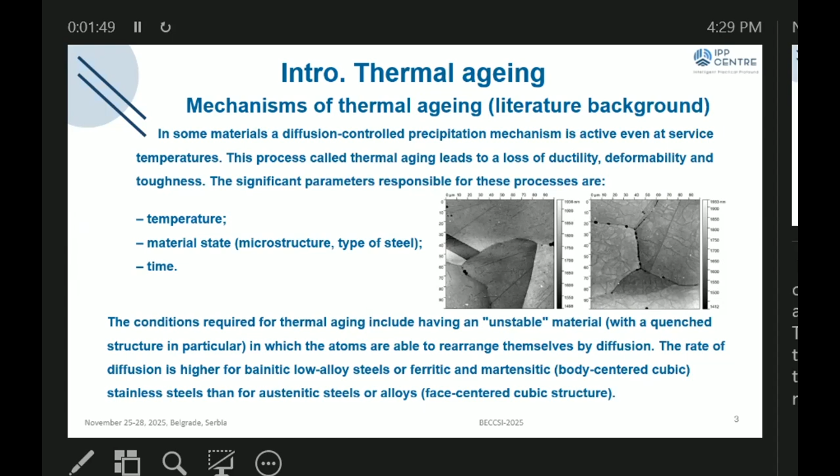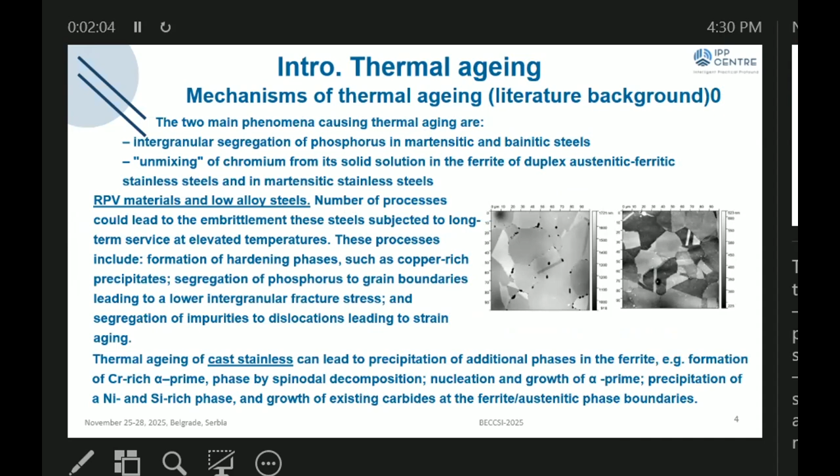The two main phenomena causing thermal aging: the first is intergranular segregation of phosphorus in martensitic and bainitic steel, and second, unmixing of chromium from solid solution in the ferrite of duplex austenitic ferritic stainless steel and in martensitic stainless steel.

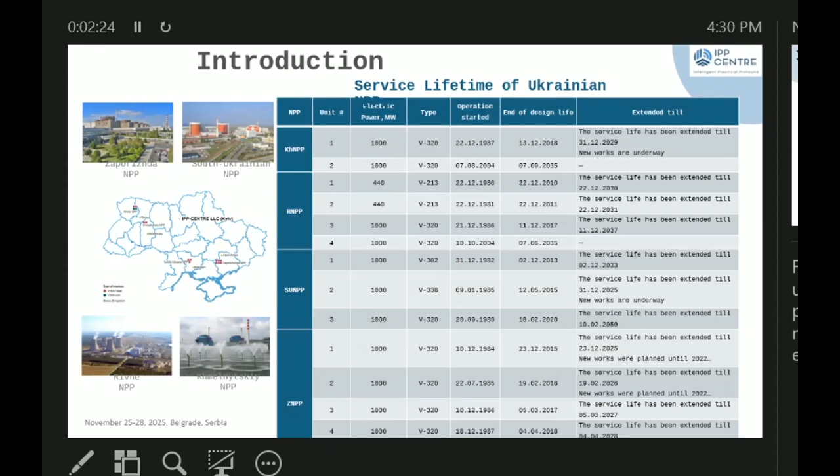In Ukraine, the mechanical properties are controlled based on hardness results. However, this method has a large error during the measurement and recalculation.

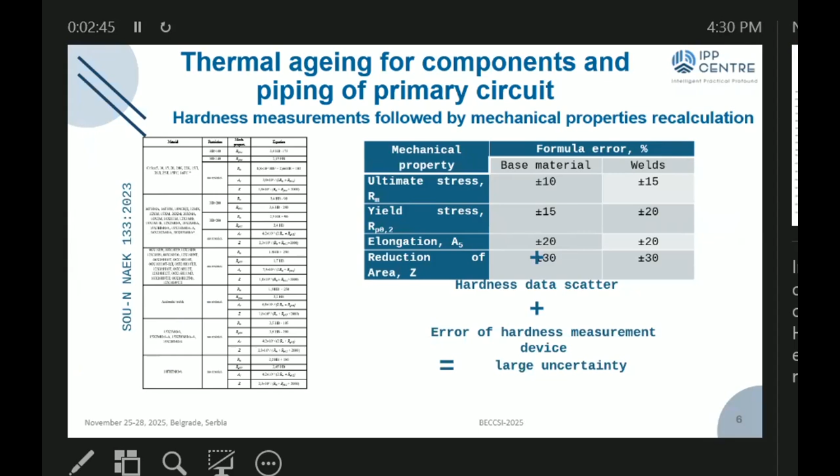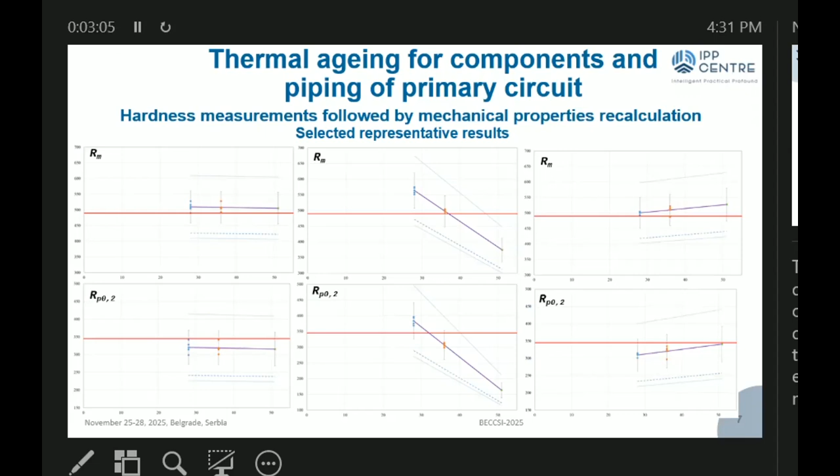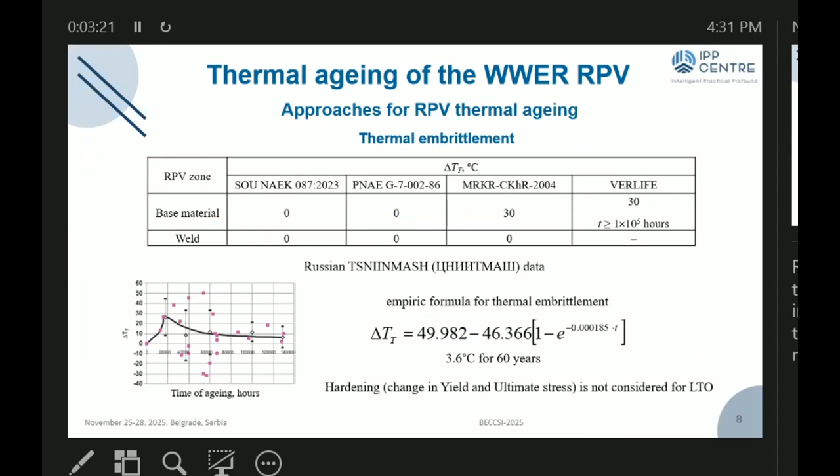Regulatory documents state that thermal embrittlement is only taken into account for the RPV. According to this document, thermal aging does not affect LTO, long-term operation. Also, thermal aging's effect hasn't been determined yet; it could affect operation up to 60 years.

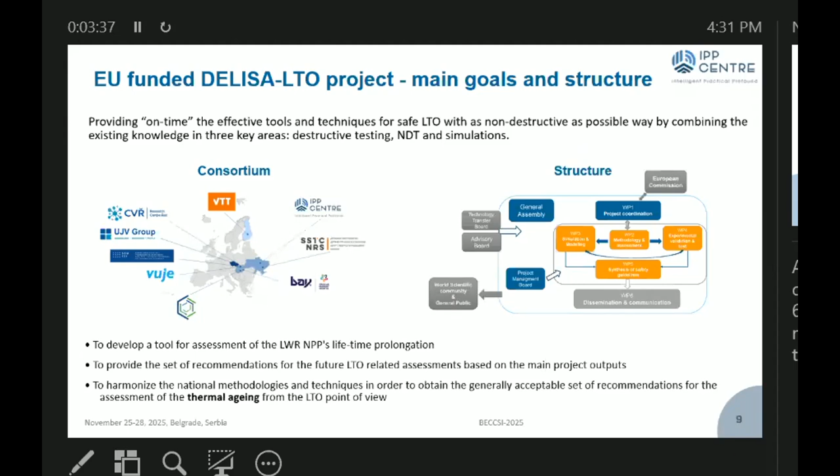Therefore, the main task of the DELISA-LTO project is to investigate the thermal aging effect. To investigate these effects, 3 materials were selected for testing.

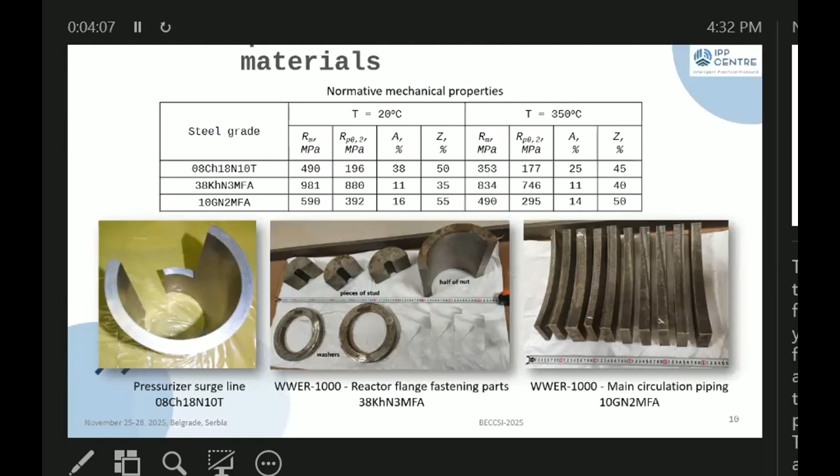The first is austenitic stainless steel cut from a pressurizer surge line after 28 years of operation. The second is ferritic steel cut from reactor flange fastening parts after 30 years of operation. And third, ferritic steel cut from main circulation piping in its initial state. The normative mechanical properties are shown in this slide.

A laboratory oven was used for artificial thermal aging. This process was carried out at a temperature of 723 degrees Kelvin. The aging time varied from 252 to 3944 hours, calculated using this equation, where T1 is the operating temperature and t1 is the operating time at the operating temperature.

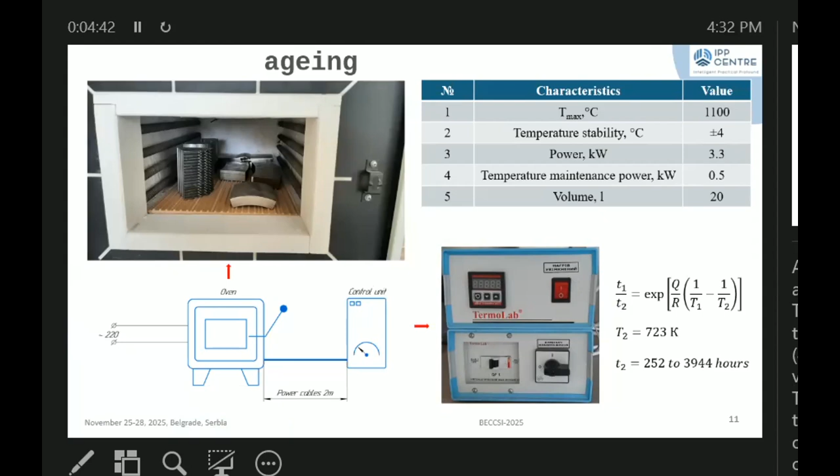To investigate thermal aging effects, 4 types of experiments were conducted. The first is the tensile test. For this test, we designed and manufactured grips with adapters, which were mounted on our testing machine. This grip allowed us to conduct experiments at both high and low temperatures. At least 3 specimens were tested for each temperature as well as each type of material.

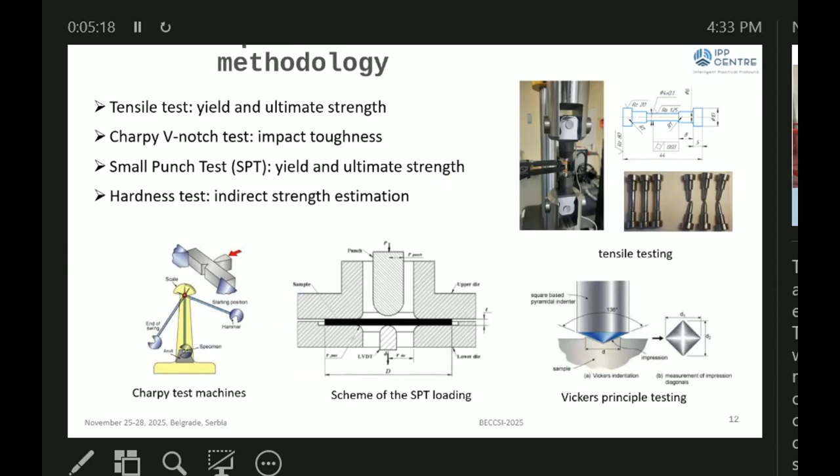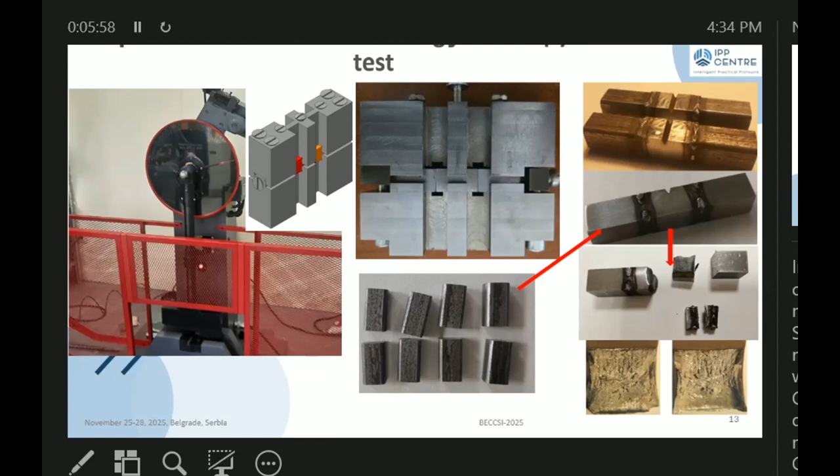Impact toughness was determined using an impact pendulum tester with a maximum impact energy of 300 joules. Given the small amount of material, a device was designed and manufactured for reconstructing the Charpy specimens using 1 broken half and 2 side inserts. The Charpy specimens were reconstructed using laser welding. We used standard Charpy specimens with notch dimensions of 10 by 10 by 55.

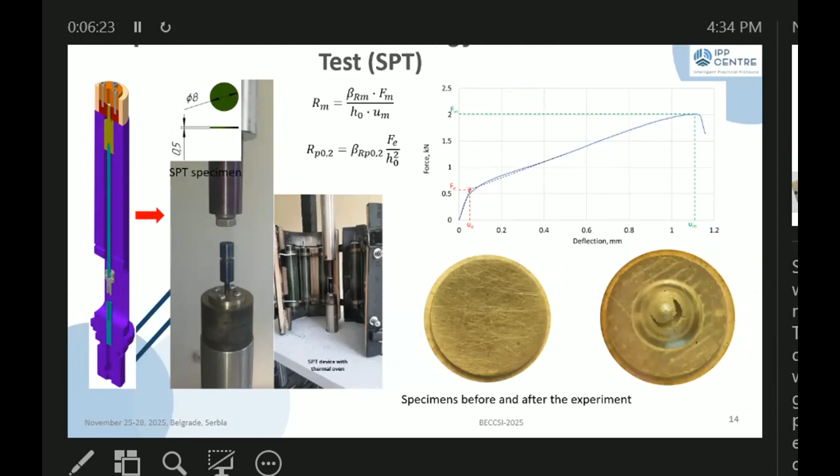Similar to the tensile test, grips with adapters were designed and manufactured for the small punch test. The grip consists of upper and lower die, between which the specimen is placed, the punch, as well as the grip bushing. Here you can also see one of the test graphs and a specimen before and after the experiments.

To determine the hardness, we prepared the metal surface in advance. The test was carried out using an Ultracon TM40 hardness tester. Using the equation shown in this table, we determined mechanical properties such as ultimate and yield strength, as well as relative elongation and reduction.

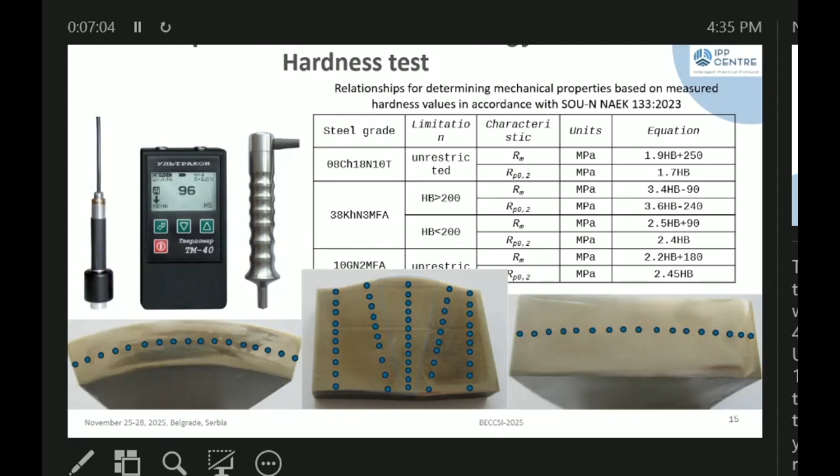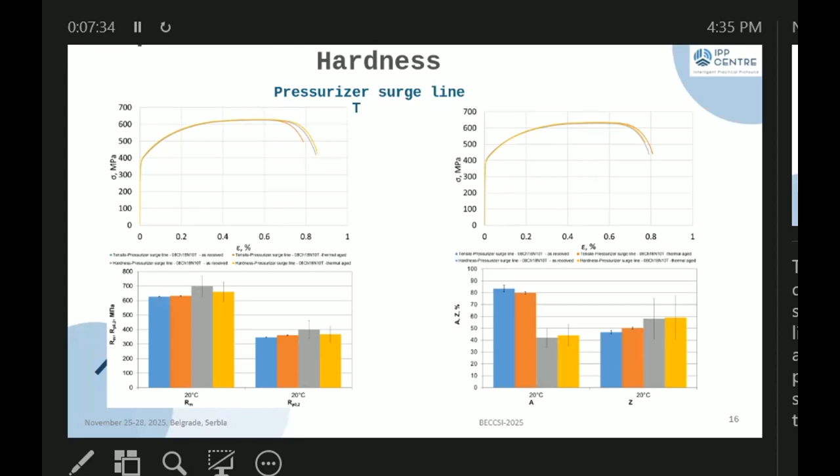This slide shows the result of determining the mechanical properties of steel cut from the pressurizer surge line. Here you can see the stress-strain diagram before and after thermal aging. As you can see, it's quite a similar diagram, and thermal aging almost has no effect on mechanical properties for austenitic stainless steel.

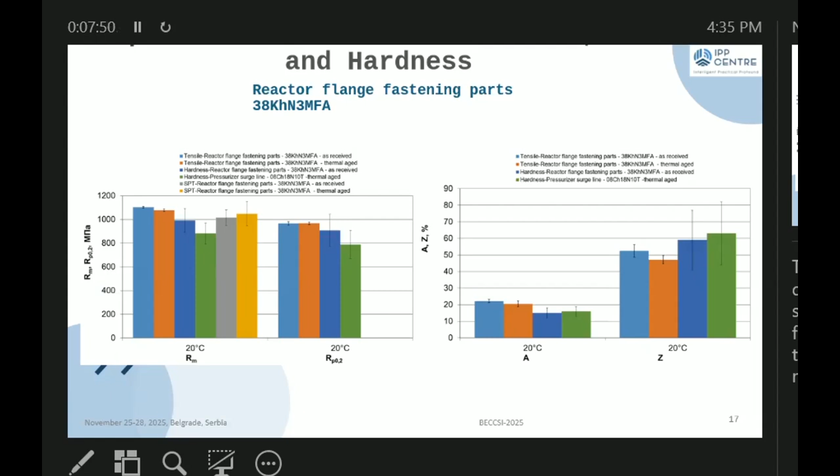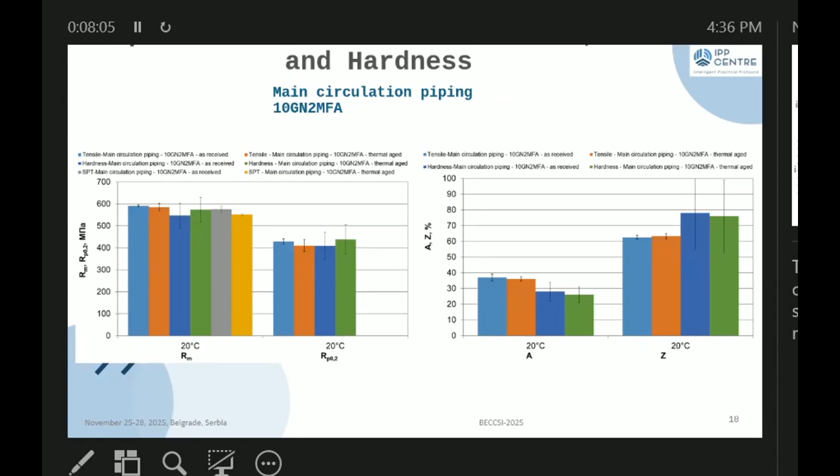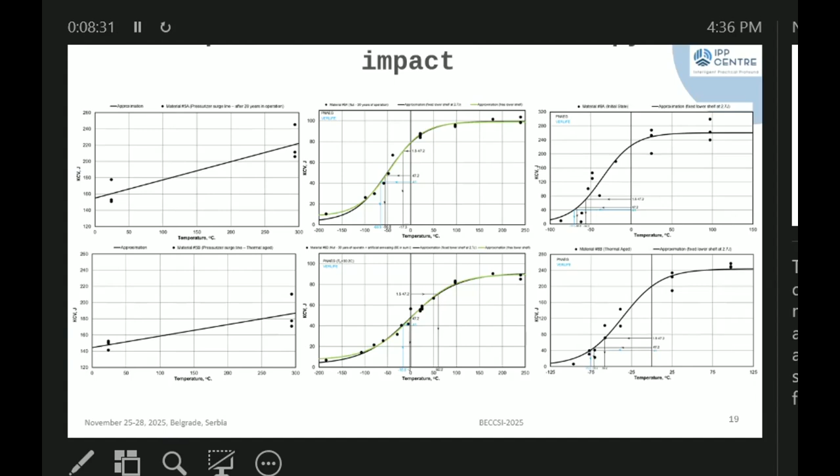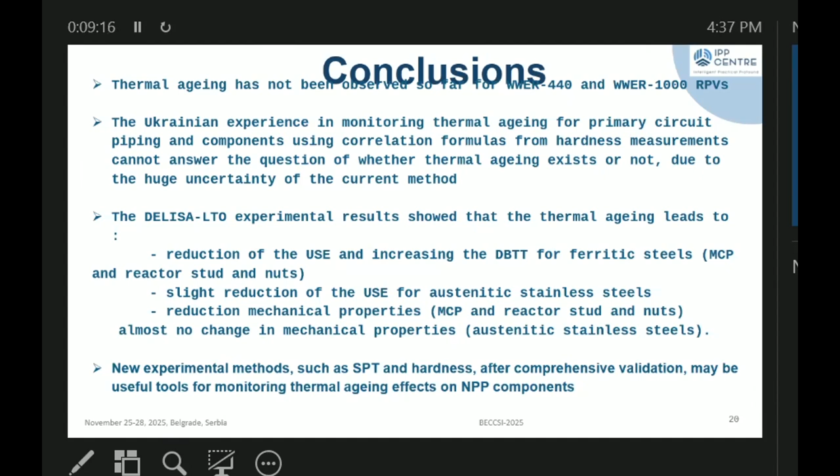And conclusion: the main result is that thermal aging leads, first for ferritic steel, to reduction of upper shelf energy and an increase in the ductile-to-brittle transition temperature, and a decrease in mechanical properties. For austenitic stainless steel, it's a slight reduction of upper shelf energy, and almost no effect on mechanical properties. Thank you so much.